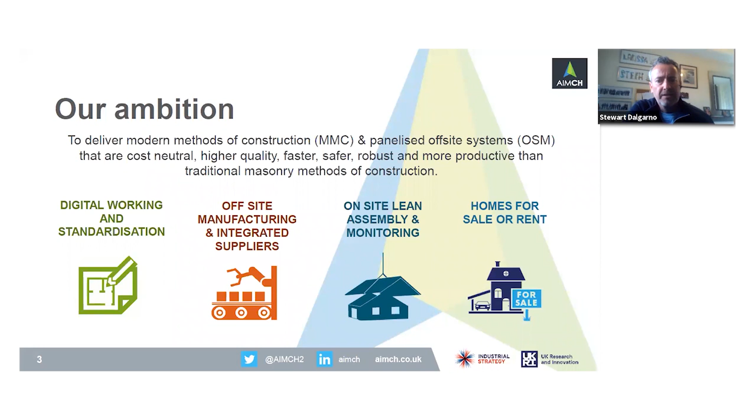We see that being done across essentially 4 key areas: through digital working and standardisation; through a more integrated offsite manufacturing supply chain and process, including the utilisation of more advanced manufacturing systems to drive costs of production down; and through more effective assembly processes on site through the adoption of lean techniques, driven through benchmarking and productivity studies, and driving out the requirement to use less labour on site - which ultimately will provide a suite of homes suitable for both the affordable market and the private residential market.

We see this as essentially an innovation project, looking at current MMC systems in the marketplace. We're looking at timber panelised systems, concrete systems and steel systems. We see that being driven forward through more integrated digital working and automation, and monitoring of existing masonry methods and open panel timber frame methods as our benchmark, then moving that to a more mainstream system where we're scaling up the output of the project over the next 2 years, heading into year 5.

Longer term, we're looking at the development of more advanced systems where we may want to include services, dry lining, external cladding, and maybe hybrid systems like a pod and panel system where we can drop in bathroom pods and services pods, for example, as part of a very efficient fabric solution. So our approach is gradual incremental change as opposed to transformational, but the scale and magnitude of change is quite impressive.

We've got 35,000 homes within the direct control of the consortium, about 15% of the market, and we feel that through dissemination and a more gradual uptake of MMC, other mainstream providers in both the affordable and private sectors will move in a similar journey.

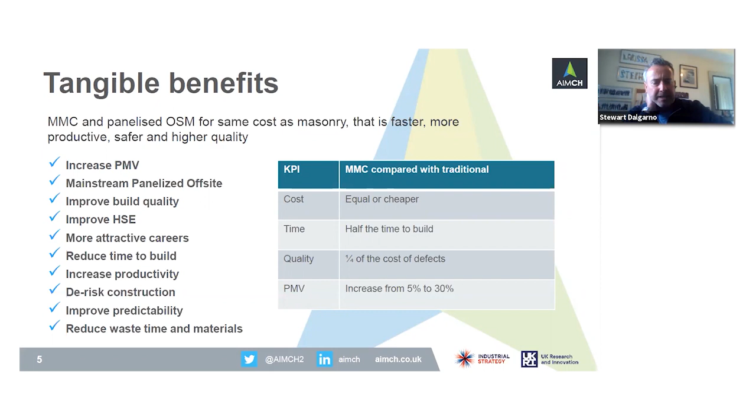Halving the time to build a house, improving our quality, and increasing the amount of pre-manufactured value, PMV, so there's more done in the factory and less done on the site.

Our first thing we've done is essentially looked at monitoring. We need data to benchmark the future systems versus the current systems in today's world. So we've undertaken research through Dundee University of previous monitoring studies done in the UK and overseas, to see what is the best type of metrics and monitoring tools to use to compare existing methods, open panel timber frame, and then the new methods we'll be prototyping in the project.

That was done about 6 months ago, and we've now got essentially a suite of productivity metrics that we're now measuring on live developments. The data is really important because that gives us a clear benchmark to be able to reference the benefits of the new systems we're going to be looking at.

We've already completed one site, the Barratt Homes development site at Peterspear in Warrington, in partnership with Homes England. A number of prototype plots have been built there, as well as mainstream open panel timber frame plots, and all of these have been monitored. Barratt's are also going to be monitoring traditional brick and block homes that we'll be building across a number of developments, and we'll collect data for both these methods so we can do the benchmarking studies.

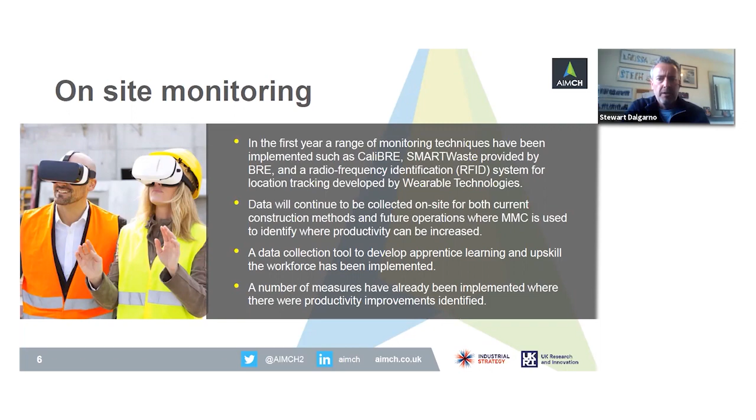We used a closed panel system, so closed, insulated, windows pre-fitted, pre-finished floor cassettes, pre-finished party wall system, scaffoldless erect system, so the whole house was built without scaffolding. We did a ground erect roof system, which was tiled at the ground level with the rainwater goods, fascia and soffit in place, and the whole roof module lifted and dropped in just under 15 minutes, and then secured.

So that house from start to finish took just under 7 hours to complete, and is essentially secure, wind and watertight, stairs fitted, finished floor in place, service cavities already preformed, roof tiled and battened, and allows the internal working to start and external brickwork to start. And it takes the scaffolding off the critical path, such that you can actually erect the timber structure and put the roof on in one go.

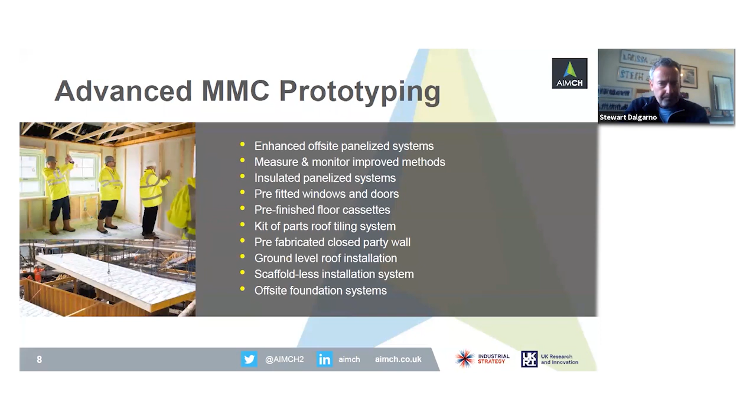With further plots to be done, L&Q have got a development at Milton Keynes. Again, those plots have been identified, and they are doing similar monitoring for their units. It's a slightly different house type with different requirements from a space standards and cost perspective, due to the whole life cost issues that are probably more prevalent in the affordable market than they would be in the private market.

We've also been doing trials with Forster Group, who are looking at an innovative roof tiling system, including the fitting of renewable systems, where they're looking to essentially pre-cut components that can then be fitted on site, reducing the dependency on site tiling systems. I'll talk about that later on. That fits well with the more integrated system you can see, if we're tiling roofs before they're completed.

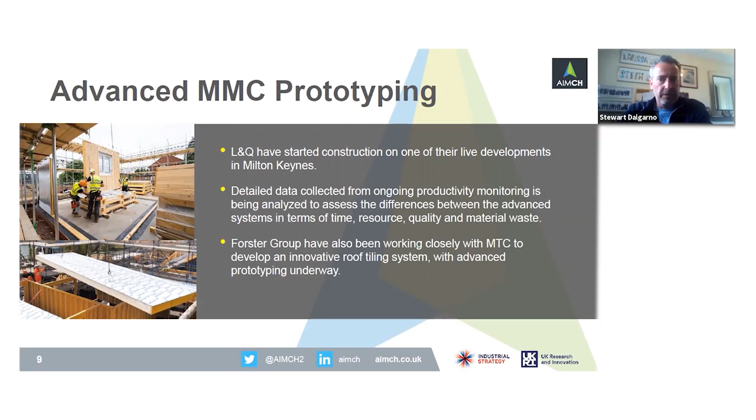Linked to this is essentially the manufacturing - so obviously a more integrated supply chain through AIMCH. Stewart Milne supply product to both Barratt's and L&Q, as do other off-site providers in the marketplace. One of the things we've been looking to do with this project is talk about scaling up these systems. So if you were to insulate walls, fit windows, etc., then you need a more developed system to be able to do it in a factory.

So we are definitely looking at more automation in the factory and use of new technologies - we're definitely looking at robotics. We've been working with our technology providers and MTC to develop robotic configurations for various different work processes, including the fitting of sheathing boards on the frames, filling insulation into the frames with different ranges of insulation, and also the factory fixing of windows with robots, and a more integrated supply chain to effectively feed components to the robot to fit into the apertures on the line.

Just to give you an idea of the output - if we were to fit a window into every wall panel currently produced in our systems, we would need to fit a window every 2.5 minutes on a production line of any configuration and size. So we've been looking at standardization to see what is the most effective supply chain and window dimensions to coordinate across the various developers - L&Q, Barratt's, and of course Stewart Milne Homes. A bit like car wheels in the automotive marketplace, they have an integrated supply chain that supplies wheels of a certain dimension that's pretty standardised, going into every car in the UK - 5 bolts and 1 lock nut, for example - but with different fenestrations in the wheels, like windows have different fenestrations. So you can see the automotive thinking and advanced smart manufacturing coming through.

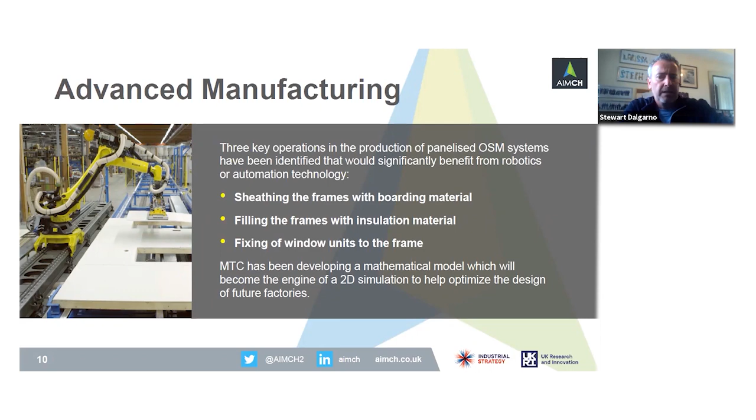Automation obviously reduces the amount of labour dependency, manual labour on a production line. Equally, getting skilled labour to work in a factory is as challenging as it is on a building site. But what we are doing here is creating world-leading manufacturing principles. There are no current automated robotics lines in the UK, and there is only one that exists in the world. We recently visited it just to get some initial awareness of what that would look like in a robotic factory of the future.

Linked to that is the deployment of these technologies, obviously the scaling up to suit different factories, future factories. So we've been developing a mathematical model and simulation tool that works on a hub and spoke type facility, where we can have manufacturing centres closer to the building sites, proportionate to the location of those developments, with the right technology put in there.

We can create 3D simulations and assess those factories before we commit the investment. Quite often in the world of MMC, a lot of people invest to develop factories without really knowing if the factory is capable of delivering what it needs to do. Some people come good, but most people probably come a cropper through that.

So as you'd expect with any car manufacturing investment, they use this technology to simulate the future factories - pretty much building a factory in virtual reality before you actually commit to that investment. That fits with the investment plans for the partners within the consortium, and provides a mechanism where other MMC suppliers in the future could adopt a similar approach to give confidence to commit to investments before they are built.

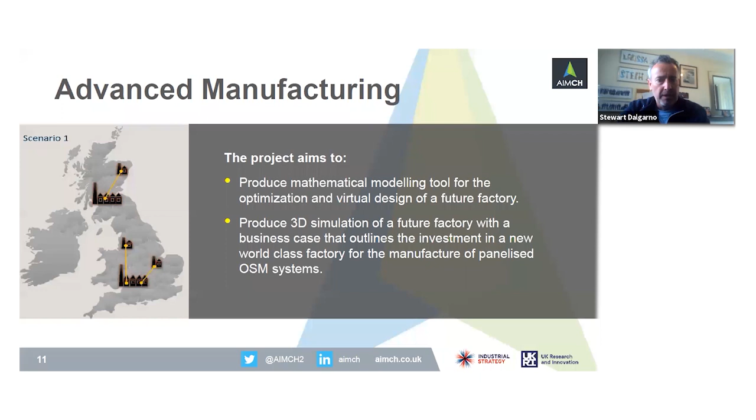Linked to that is really the upstream integration piece, which feeds in with the digitisation piece. We're looking at the integration of BIM and ERP systems. For those who don't know, an ERP system is an enterprise resource planning system that acts as the golden link underpinning integration of any digital system in a business - linking your customer relations modules, your finance modules, your smart manufacturing, your commercial modules, and ultimately your supply chain modules, getting product in a simple way to the building site.

We found that in the world of offsite production, it's quite a complicated business model, offsite manufacturing. There's no go-to standard ERP system out there that would work, because we're quite specialised in terms of manufacturing. We're also an installer quite often, so we're effectively a subcontractor. The business operates in a project environment, unlike other manufacturing environments which tend to make lots of the same thing.

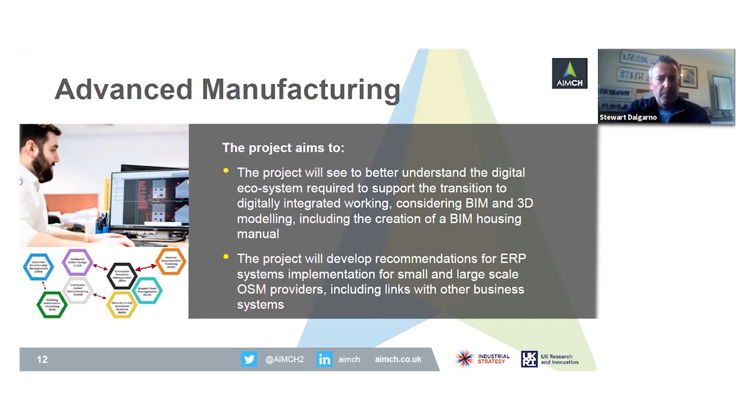We tend to make lots of something totally different and bespoke to every project that's built, typically on a building site. So we've been creating a mechanism where we can schedule out the requirements and specify an ERP system that can integrate with BIM and 3D technologies, feeding the data direct into the robotic work centres, and therefore produce volume and scale at a lower price point.

Linked to that is housing design - working with the developers to see how we can standardise housing designs. Nothing really new here, but a lot of people have tried to do this in the past. We've undertaken variability studies across the Stewart Milne house range, the Barratt house ranges, and the L&Q house ranges. That's shown there's a significant amount of variability even across the AIMCH developer partners, and that gives us an opportunity to standardise.

So we've been looking at what elements we need to standardise, and to do that we've created a suite of product families - looking at the shell of the building in terms of standardised wall heights, floor heights, dimensions, sizes optimised to suit the factory production systems. Almost like a kit of parts, looking at a suite of apertures that can accommodate all the various house styles the developers produce.

Looking at things like stairs, bathrooms and wet rooms, en suites as well, and services - so we can maybe have a prefabricated service cupboard of the future, maybe bathroom pods of the future that can be dropped in, optimised and produced at scale.

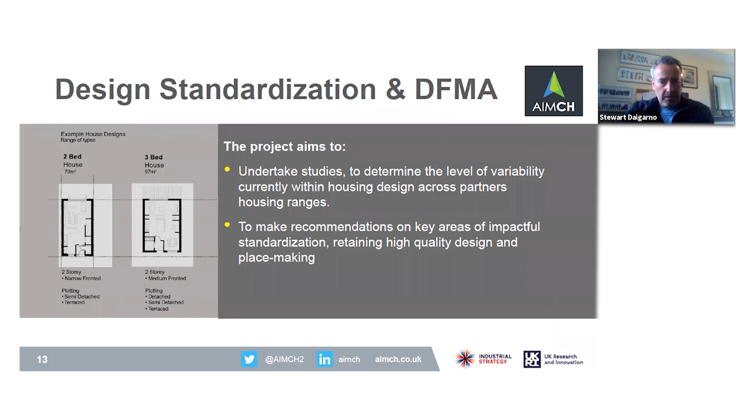Some of this you've seen before, but there's a lot of detail behind this. It's not as straightforward as you might think. To get the right sizes, to look at the floor levels, to look at the detailing around the walls, to think about the weatherproofing, to think about the sequencing, what can be prefabricated, what can't be prefabricated, how do you handle the customization piece for customers in the future, particularly in the private market where they're picking choices in terms of colours of tiles etc. And essentially starting sort of designing a new house range, working with these building blocks, as opposed to essentially working from a footprint driven by floor area and then trying to shoehorn in the various different spaces to suit the areas.

So this feeds into our future 3D housing models. We'll be preparing a suite of AIMCH 3D housing models of the future, which are optimized to suit these product families. And the last thing you see there is a DFMA guide, design for manufacture and assembly, looking at preparing a DFMA guide for panelized MMC systems where the optimum heights, wall thicknesses, dimensions, spans etc. And those three things can flow into a standardized house range.

The beauty of the image where we've done the prototypes is essentially still cladding it with masonry, so you have the benefits of a conventional cavity and masonry wall. You still need a brickie on the site. We reckon we can build houses in around about 10 weeks, including foundations. But you still have the benefits of that external masonry facade, so you can have the different fenestrations to suit the local market. You've got the street scene appeal, so you're creating beautiful homes at the same time, and they're not coming out with cladding systems that maybe have concerns in the future about longevity and maybe look less appealing to the eye than a conventional masonry clad home using different materials such as stone, brick, block and render solutions.

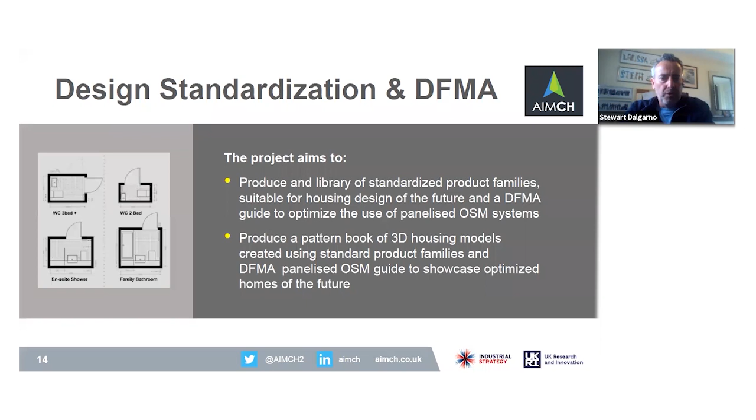So the last few slides, we've also added in to the project an evaluation of embodied carbon and whole life costs. We've commissioned research to look at the embodied carbon benefits of MMC panelized systems versus traditional methods, looking at different material types including timber, steel and concrete, and their carbon footprint compared to traditional methods. We think that will be a big thing going forward as part of the climate change agenda, and we need to understand the use of materials and the impact that's got on the climate upstream and downstream of completed homes.

So we're doing the embodied carbon modelling for homes and the systems used. We've also commissioned research on the whole life cost of MMC, looking at the MMC benefits, hopefully of panelised systems compared to traditional methods over a 20, 40 and 60-year lifespan. There's not much research and data around about that currently, there's a lot of views and opinions about the benefits, or maybe not the benefits of that. So the research will look to validate what are the issues and what are the benefits associated with whole life costs of MMC, so that those who value whole life cost and not lowest capital cost have both views available to them - whether you're an affordable provider who maybe values those whole life cost benefits, compared to maybe a private developer who's maybe looking at more of a lower build cost starting position.

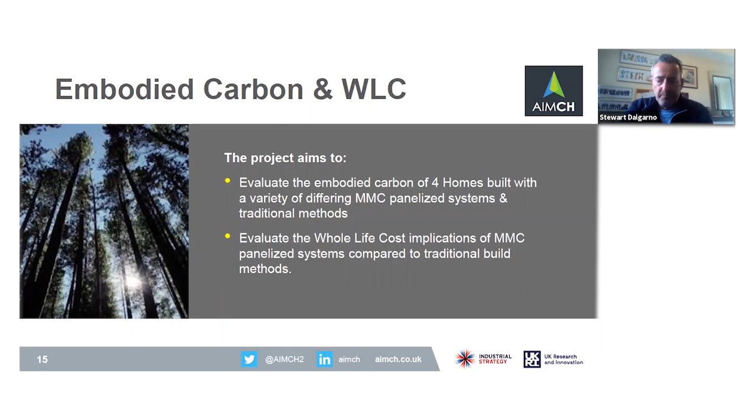We're also looking at augmented reality. Our partner Forster are developing an innovative roof tiling system, and that's underway. They're working with MTC, and they've got a test rig being built in the facilities at MTC in Coventry, where they'll be doing some initial proof of concept work within the research facilities there.

That's linked to essentially the digitisation of the roof shape. So once a roof's built, so to speak, taking a very digital record of the dimensions of that roof to feed into a process which will allow them to then develop their roof tiling system, avoiding the use of cutting on the building site and things like silica dust that comes with that, reducing the cost of labour on site by circa 30%. And then linking that through to the augmented reality helmets, so you can actually have a pattern of how to lay the roof tiling systems onto the roof, doing away with paper essentially, and looking at the sort of intelligent headset technology, a bit like the HoloLens technology, to place that material onto that roof template. And some of that learning could also flow into other work centres within the AIMCH consortium, where that type of technology would be useful.

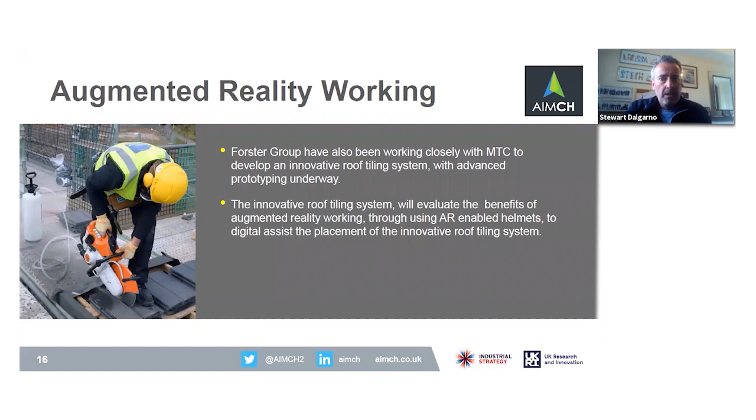All of this is linked to commercial viability, so the key outcome is a cost neutral price point. From that, we are modelling all of our costs back to effectively the private market and the affordable market. We looked at regional variances. We know the cost of masonry, open panel timber frame, closed panel timber frame, and other MMC panelised systems, and we'll be able to look at where we think the price point can get to as we introduce learnings from the project, scale up, introduce robotics, introduce standardisation, and productivity benefits on site. Our goal is essentially to achieve the same, if not less, cost than masonry built.

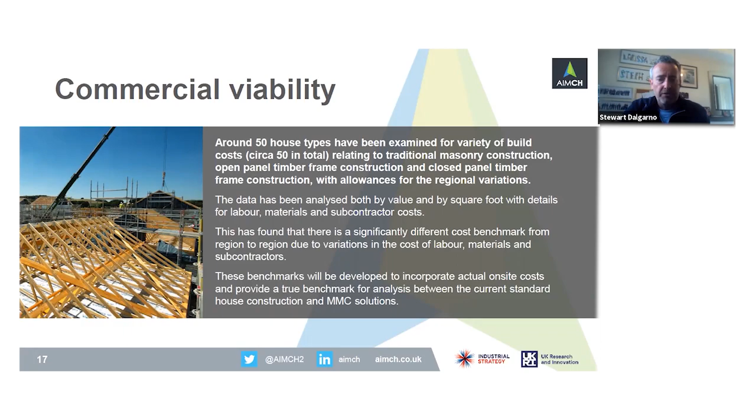So wider industry engagement - this is an example today where we're sharing some of the outputs and thoughts about the project. We've got a website, aimch.co.uk, and most of our information will be put up there over time.

The project is 15 months old now. We've had a 3 month delay because of COVID, so some of the work packages have slowed, but everything's coming back now, and we expect to be fully up and running again within the next couple of weeks on most work packages, and we'll continue to share that. We are going to be taking part in the Future of Building Week, part of Innovate UK's showcase celebrating the 2-year anniversary of the industrial strategy and the transforming construction calls, and we'll be featuring some of the showreel information you'll be able to download from the website in a week's time.

So some of the people we've engaged with - we have a stakeholder group that sits alongside the main steering group of the project, chaired by Simon Dudley, the chairman of Homes England, who are very interested in the outputs. We've got a number of organisations involved, and we meet every 6 months to share progress, some of the challenges we're experiencing, some concerns, but also some of the benefits and exploitable outcomes. So we take people with us on the journey.